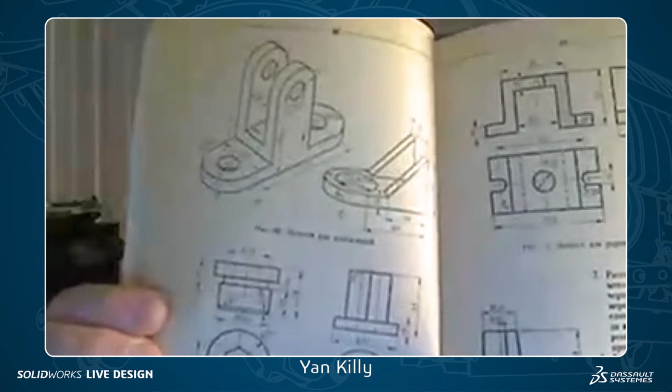I'm a product of drafting, okay? I don't know if you can see it. This is my high school drafting book. I'm not going to tell you what year it's from, but this is what I learned. So it's really front view, top view, side view for me. This is how I think in my head, so it's much easier for me to do that. And for certain things, you can just get away with 2D drafting because it's simple stuff. You don't need very complex stuff.

So what I'll do is use a real life example of the hammer. And the reason I'm going to do the hammer is because my grandson comes every week and stays with us a couple of days. And he likes to do things. His favorite thing is to cut something, to drill something, then to hammer something. Let me start my presentation real quick and you'll understand what's happening.

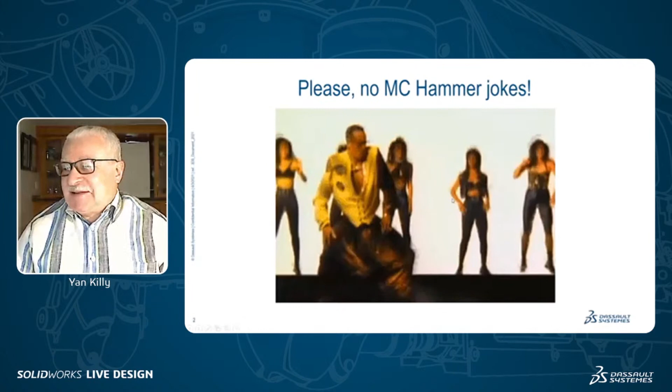Oh yeah, please, no more MC Hammer jokes. Oh, okay? Come on. Here's your pants. Brad donated these pants. So no more MC Hammer time, okay?

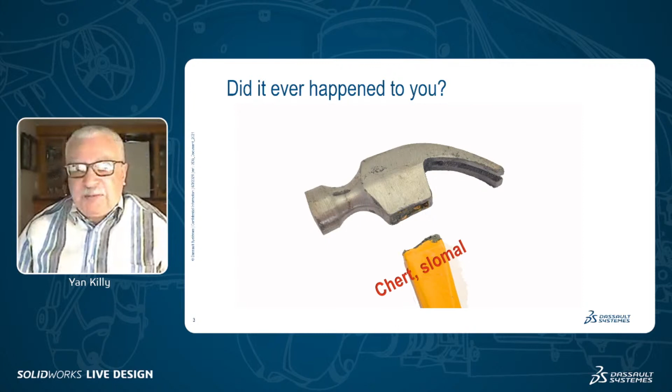So now, the reason it happened, did it ever happen to you? I used the hammer, and instead of hammering with my grandson, I tried to use it as a crowbar. It doesn't work very well. So it snaps. So I went and bought another one. Then guess what I did next week? I broke it again. And I said, well, I don't want to spend another $20. I want to build a handle. But what happens is this, I slomal it.

Slomal, what is this? Is there a Laverne and Shirley reference here? No, it's actually Russian. I promise anybody who speaks Russian knows I'm not using a really bad profanity word. Basically I said, darn it, I broke it again. So this is Russian for darn it. Kind of. What's the chert? Chort, it's darn. Chort, slomal, I broke it. Oh, yeah. How about that?

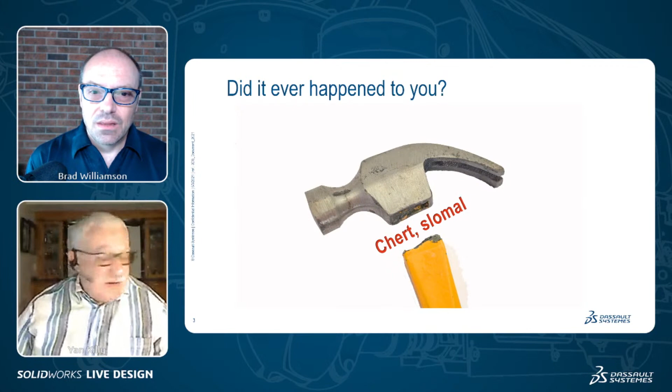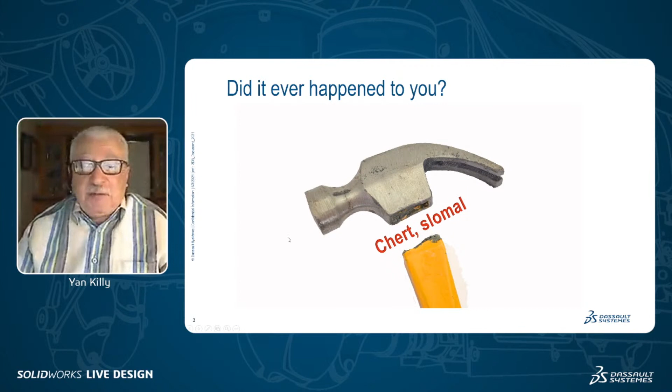So without any further ado, I showed you already this hammer. So what I decided to do, I used my trusted calipers and my scale, and I started measuring. I said, next time I'm just going to build one instead of buying it, because the hammer piece is still fine. So we'll switch over. I'm going to spend a little time because most of our users are SolidWorks users.

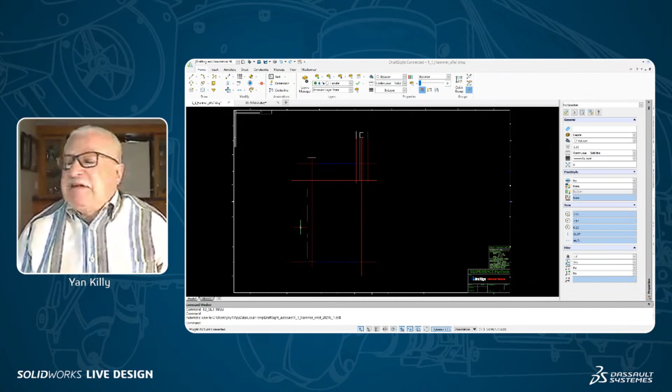So they probably never seen DraftSight, but if you ever used AutoCAD, this is 90% of DraftSight. As a matter of fact, it even speaks AutoCAD. So this is 2D. This is pretty much the common look and layout of a lot of 2D programs that DraftSight borrows from.

You can actually create your own layout that you like to use and save it. You can also go into Classic, which, if you ever used AutoCAD, is pretty much how AutoCAD looks. So if you're more comfortable with that, you can select different things and use them if that's what you want. It's like the old school icons, with the command lines down there.

Just incidentally, everybody joining in on the chat, I'd be curious to know how many of you came from a 2D background. Maybe that's what you learned design on. That'd be interesting to know, chime in if that's you. I'd also be interested to know if there's 2D still being used at the companies you work at. I'd be pretty surprised if there's not 2D somewhere, because DWG is still pretty much the language of a lot of engineering and design, isn't it, Yan?

Absolutely. I still, when I need to go to Home Depot and buy something to fix in the house, guess what I do? I do a quick sketch and measure in 2D, and I go into Home Depot to buy stuff. Well, it makes sense because your background is electronics and PCB, right? Right, I'm a PCB designer really, so although we had to deal with chassis and panels, they were all done in 2D at that time, a long time ago. So I started in 2D.

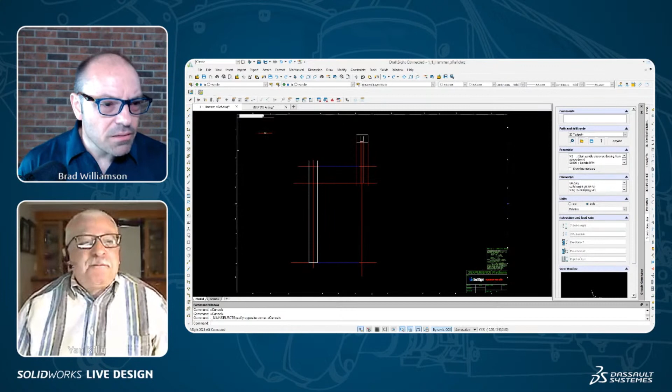So what I'll do, like I said, this is the kind of interface you want, you can do that. I prefer our classic interface from DraftSight. And again, if you want to do lines, you can do lines, you can do different things, you can switch over to different annotations.

So it's very easy. I'm going to add one more in here and go into mouse gestures. If I click on this, it's already all the buttons and quadrants that it's programmed, and what kind of commands I'm going to use. Power trim is used a lot. Is that like SolidWorks Power Trim? You'll see, I'm actually going to show. Yes it is, and actually the other software that starts with A and ends with D does not have power trim, does not have mouse gestures. So we're trying to make it easy for SolidWorks users to use it, and it's fairly simple.

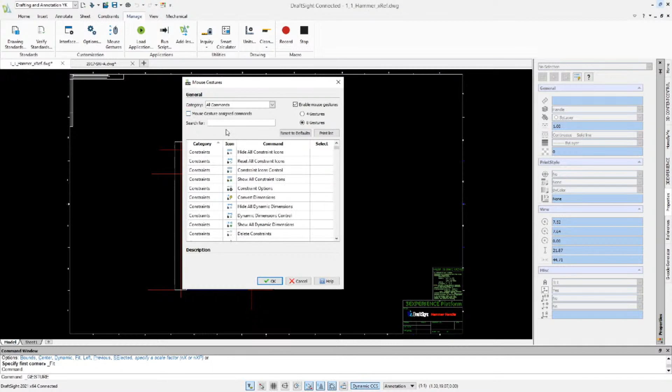Wow, okay. So now I'm going to use a spline. I find the spline, and here I'm going to assign it to the top quadrant and say okay. And now if I go in here, here's my spline.

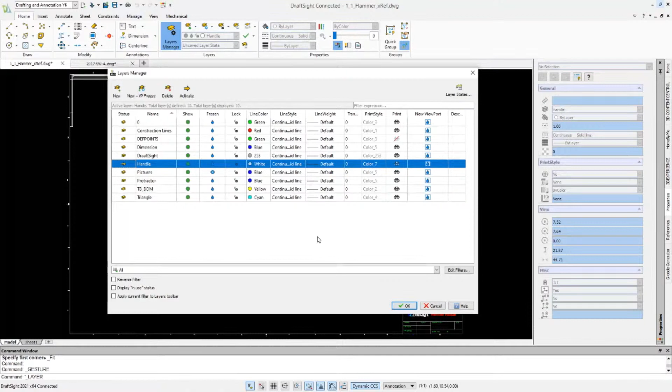So now the reason I brought up layers is they're used a lot in DraftSight. Basically, you put lines on certain layers, you put holes, you put dimensions, you segregate everything by layers, and you can display them on and off. So you use layers a lot.

Now, I like to be more efficient. I don't like to go to the top of the screen, so I can type in, like in other software, if I know the commands, type layers. Notice in the lower left corner, it starts 'lay' and goes to 'layers'. I can click on layers, okay, and it brings this up. Except I don't even want to look down in the lower corner of my screen, so I'm going to activate this, and now wherever I am, I type in, and it pops right where I am, so I don't even have to look down.

Nice. But I don't even like to type. So there are a lot of keyboard shortcuts for users who used that other software before. Like, I know layers - let's say purge, although in DraftSight it's called clean - but I can type purge and it'll do the same thing.

It removes things like line types or blocks I've used in the drawing that I deleted, but they kind of sit in the database, so purging reduces the file size. So what you're saying is DraftSight has its own name for the command, but also recognizes the command name you might know from other software. Exactly, so it's very easy to pick up.

Okay, let's move on. Just one more thing about layers. If you want to draw lines on this white layer, which is my hidden layer, or construction lines on the red layer, you normally have to go and manually switch layers all the time.

But DraftSight did something else. We have TB layers, and in here I can actually say, if I'm going to do dimensions, no matter what layer is active, put it on the dimensions layer automatically. You can set this up based on your standard and save it as a template, so whenever you start a new drawing everything is already configured, meaning very little setup time is needed.

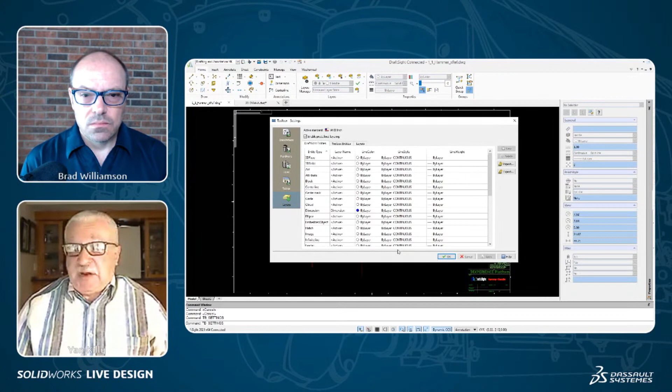That's pretty cool, I didn't know it could do that. What is that called again, TB layers? Yes, it's called TB layers, it comes from the Mechanical Toolbox. You have a shortcut you can click on that goes into settings, where you configure whatever entities go automatically onto which layer. So it's pretty cool, that's great.

So let's move on. I took my hammer, made very careful measurements, drew the handle from the side view, and set it as a block. Now I'm going to insert the block. Where is the insert block command in here?

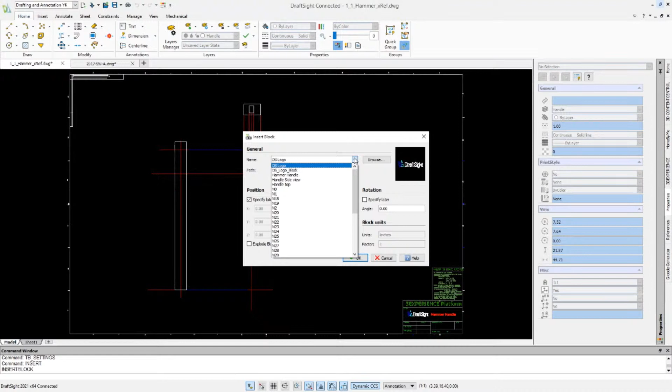I have no idea, and even though DraftSight is the product I support, I don't have to worry about it because I'm just going to type 'insert,' and there it is - I don't even have to look. I'm going to insert the block, simple as that. I could have even programmed it into my mouse gesture if I used it a lot, but I don't.

I'm going to insert the hammer side view, say OK, and notice as I move it snaps because I activated eSnap, so it can snap to different entities. So here it is, and now I've inserted it.

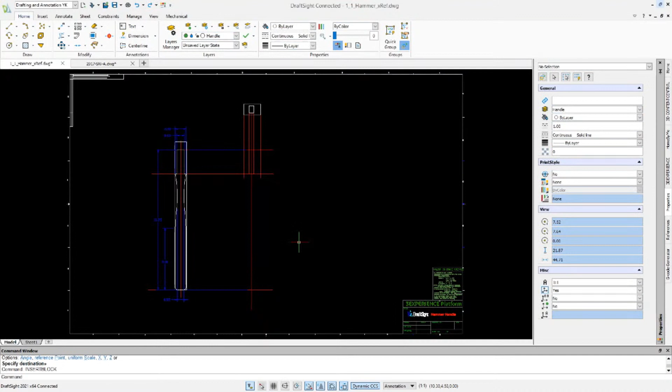I don't want to insert it again, but now I'm going to do a zoom area and zoom in - I put it in like a little block. So I'm going to delete this block, and delete that. This is the handle from the hammer that looks like this, and here are the dimensions I put in.

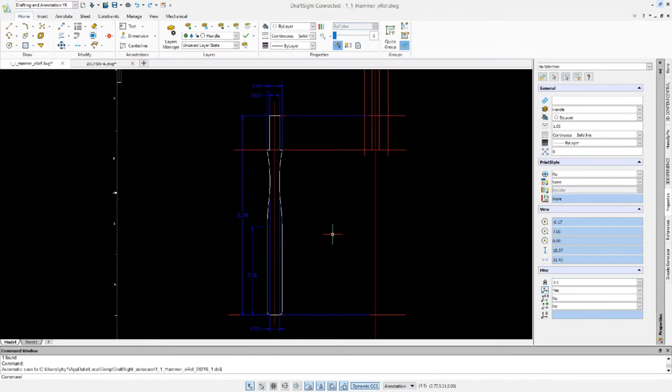Now it's time to do the front view, which is a little more complex and has some curves, like the other side did. Now I have to sit and measure, so you're going to have to bear with me - I'm going to sit and measure and draw all of this. It's going to take a long time.

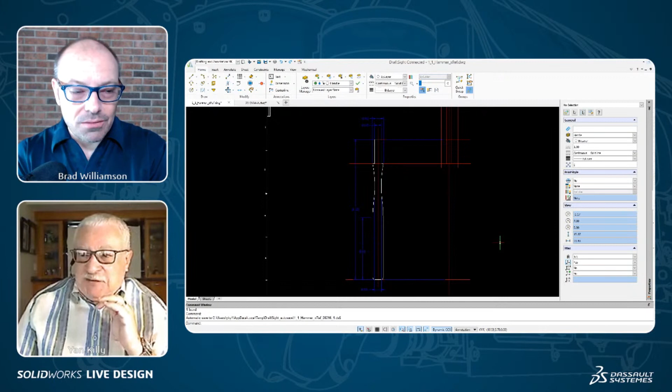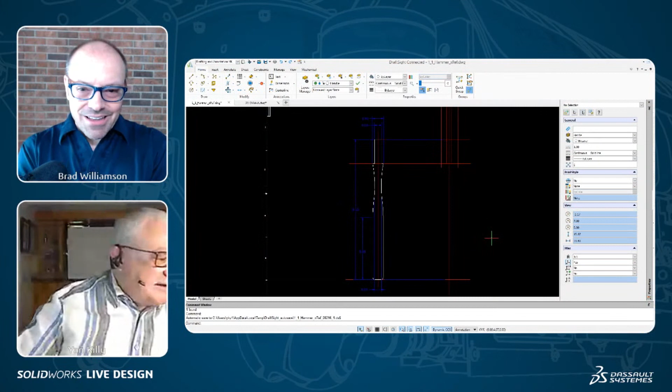Oh, question here - Tomas is asking what is the name of the book you held up, your mechanical drawing book? It's called Cherchenia, which means drafting in Russian. Cherchenia, wow, okay. Yes, it's from the 8th grade of high school.

So you're going to go ahead and measure this handle? Why don't you just take a picture? I saw a live design where Mark Peterson took a picture of the thing and just traced around it. Oh, that's a great idea. I don't know why I didn't think of it myself.

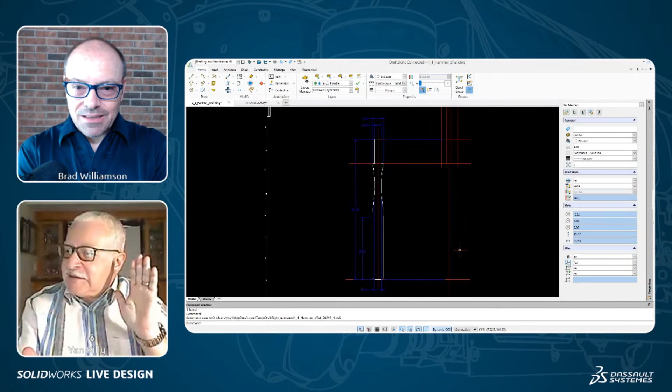So, magic, forward five minutes - I took the pictures and brought them in. We're going to go into the layers and activate my pictures. This is the hammer, this is the scale - I took the picture and put it in, and I'm going to trace it instead of very carefully drawing it with dimensions. Again, I'm going to turn ortho off.

I'm going to take my spline and start with the spline, very slowly. I might modify it a little bit to make it better - it doesn't have to be exactly the same, right? We can improve it as we go along.

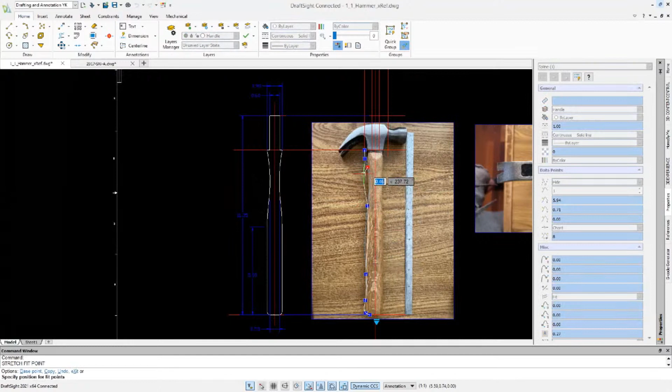And again, we say okay and enter. So here's the spline. Let me see if I can modify it just a little bit. Let me move this to this side. Okay, let's move this here. About right there. Okay, kind of looks good. Maybe a little bit more here. So you can play around, and I kind of like this.

Then I'm going to do a line. The line is going to start from here, because snap is on, it snaps to the actual construction lines. I'm going to add one here and one more in there. Now I have to draw the other side.

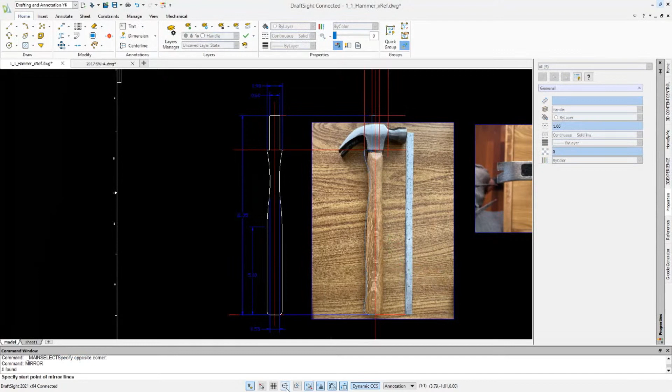I'm lazy, I don't like to draw everything from scratch. So how about we just select all of that, and I'm going to type mirror. Now I'm going to activate my ortho, and start from this point to this point, and basically that's the handle.

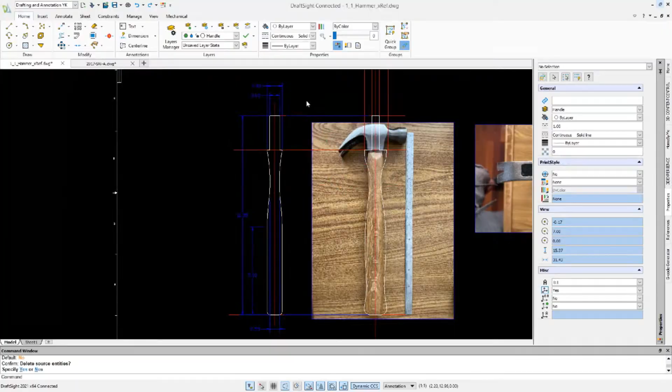Makes sense. Okay, very simple. I was talking yesterday to Brad prepping for this, and Brad goes, Yan, why do you need to complicate your life? Why not just make it axisymmetric and turn it on the lathe, without all this? I said, okay, let's not even worry about that, let's just concentrate on this part. Doesn't that make sense? I mean, for me, I always look for an excuse to go buy a new tool. If I were going to make a new handle rather than buy a new hammer, that's an excuse to go buy one of those little shop lathes.

But as we go along now, it looks good, right? So maybe we don't need to see any more construction lines, I'm just going to turn them off too. I'm just going to freeze it for right now, I didn't lock it. What do you mean by that term freeze, is that like hide? Yeah, it's hiding it, it's still there, I can always bring it back on.

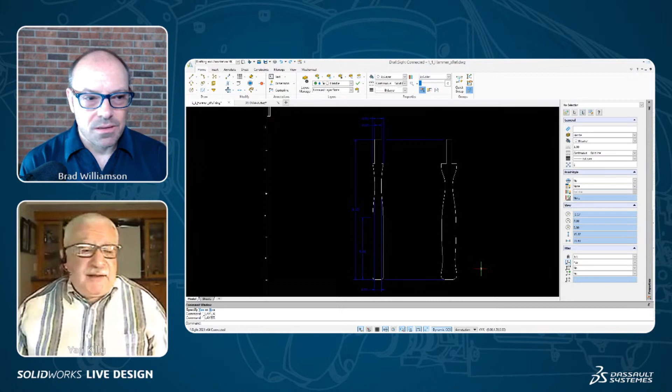Okay, so here's the handle. Again, as we're talking, I wish I could take credit for everything, but Brad actually said, Yan, why don't you have some grooves in there so it doesn't slip from your hand?

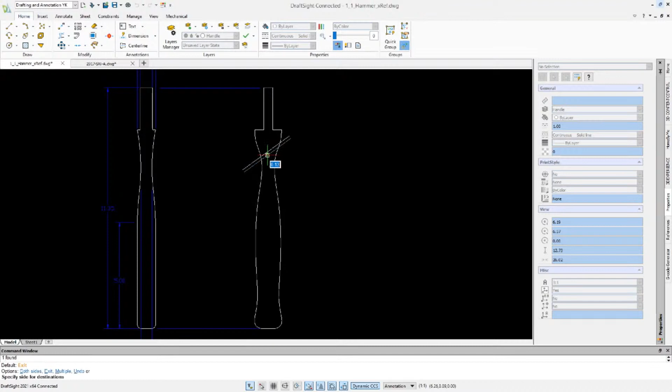So we're going to zoom in a little bit. I'm going to do this, and then we'll use a power trim tool for it. So I'm going to do a very simple line, just starting from here to here. Now how about if we offset this line, and you can specify 0.13, which is the standard tool, and there it is. So I created this, right?

Then the next thing we're going to do is I'm going to select this, and use array, or in our speak, in DraftSight, it's called patterns. But you can type array, it's the same thing. Yeah, so in Solidworks speak also, pattern. Yeah exactly, pattern, array, same thing.

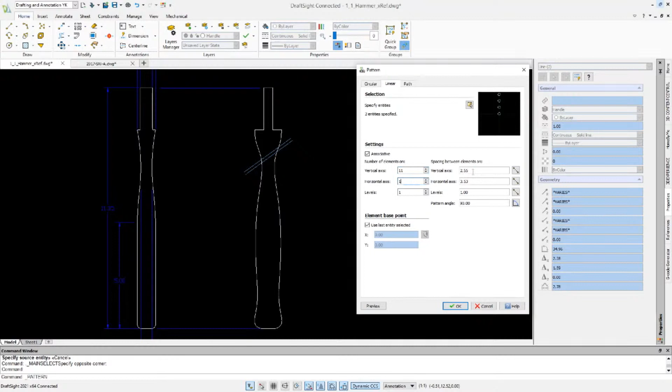So I'm going to say I'm going to make 11, I'm going to do only 1, and I'm going to go minus 0.8. If I'm satisfied, I'm going to say okay. Well, there it is, that's pretty slick. And I did this pattern associative - the difference is associative means it's kind of a block and I can modify it.

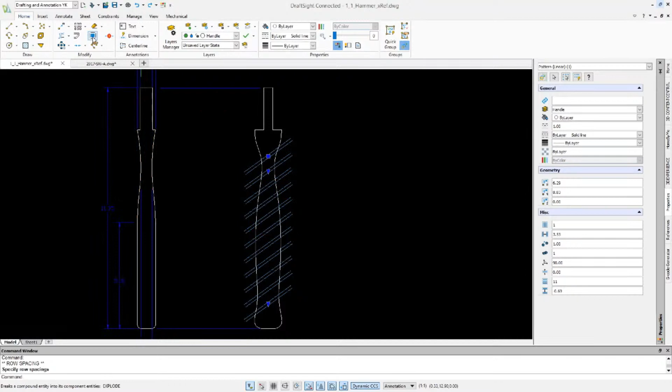Now let me show you what it means, and later I'll explode it. So if I select this, you see these handles right here, I can move them around dynamically, very quickly, and readjust it. Let's say I'm going to do it like this - this is the one I like. So associative is like parametric? Yes, so you can actually enter all the parametric data that you want, and dynamically adjust it using those handles when I'm modifying it.

Now, to trim it, because it's kind of a block, I need to explode it.

Very simply, I'm going to select the explode, or I could have typed explode in my command box, and now they're all individual pieces again. Okay? Now I need to do the trim. Of course, the trims are here. There is normal trim, there is power trim, there is end trim, fill. There's a lot of commands. But all I'm going to do is the trim.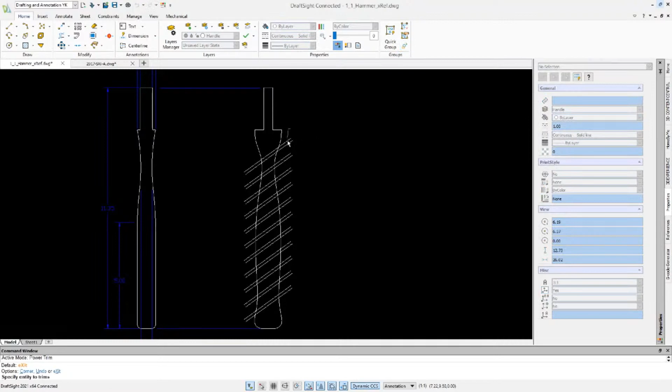So I'm going to go into my mouse gesture, and this is where I program my trim. And all I have to do is just hold my mouse down. I forgot to explode it. Explode. I thought I did. Explode. Okay. If it's exploded. Yep, it is. Looks like it. Okay. So when you explode it, it makes it just like regular entities then. They're not linked together. And now I'm using the power trim. I just go done. And oops.

That's just like SolidWorks 3D. Exactly. So again, we build so much similarities for the users, so you can be comfortable. Again, if you're doing something simple, for me, it's easier to do it in this format, okay, instead of going and build a 3D model. Nothing wrong with that, but I can just do this real quickly in here. And if, let's say, I'm doing a gasket, something simple, I can quickly do it in DraftSight and then send it to Omax WaterJet and have it cut out for me in no time at all, okay?

Yeah, makes sense. I don't think 2D necessarily means old technology. It just means that for a lot of disciplines, it's really just kind of the best tool for the job. Like you said, coming out of an electronics background, it was just right. It was just the better tool.

Yep. So now one more thing I'm going to do. I'm going to quickly do a couple dimensions and see how easy it is. It's really that easy. So I'm going to activate again. I'm going to do ortho. You can go dimensions. You can go an actual dimension. There is much more than that. I'm just going to go very simple linear dimensions. I want to know how big this is. And here's the dimension. Now I'm going to go from here, just hit again here, from here to here. Here's another dimension.

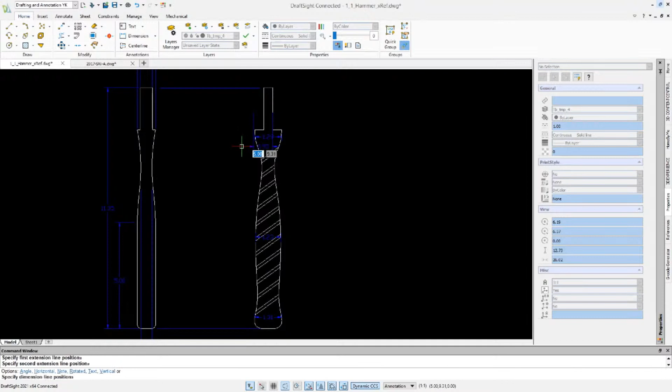Maybe this one. From here to here. That's fine. I should have moved it. Control Z. Control Z, undo. Yep. Same. Everything. Basically, if you know Windows, it's the same thing. Now I'm just going to do this from here to here, and from there to there. Simple stuff, and maybe a couple more. Yeah. What's overall length, I guess, is from the other view. Yep.

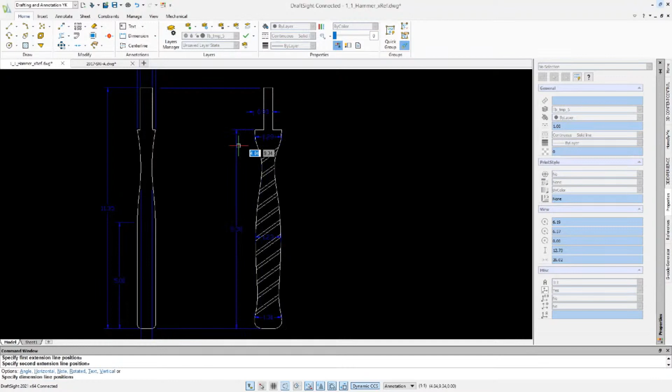I accidentally escaped from the command, so I'm gonna go from this point to this point, and then there you go. From this point to this point, and it's right there. Fully defined every time. Well, over-defined now, but okay. Yeah, but let me just delete this. We don't need this. So now you're going to say, why would you dimension this inside the handle? I mean, this is not the norm, right?

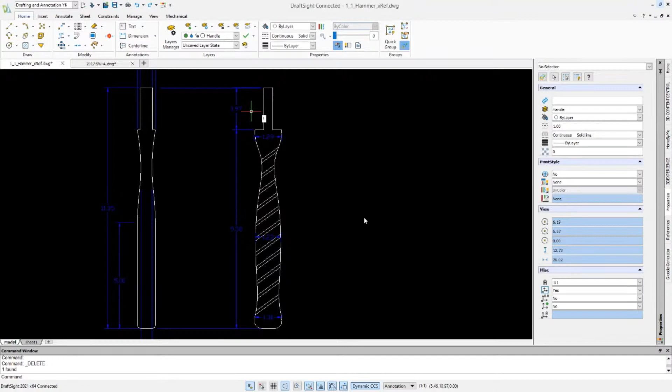Brad, if I really do this and give this drawing to the shop floor, they're going to come scream at me and say, you don't put dimensions inside. There's actually a method to this madness, why I did it this way, okay? If you bear with me, I want to show you why. Well, I'm planning to buy this wood turning table, and it's got the tool rest. And maybe I can print this one-to-one and overlay the tool, and I don't have to even measure it and cut this. Yeah. So how about we print this?

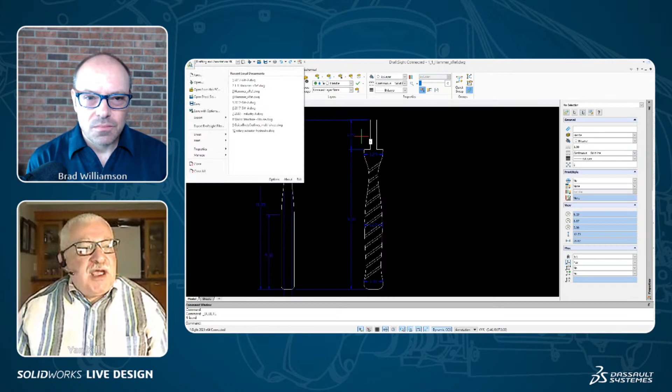And not only that we're going to print it, we're going to switch over to legal size. We're going to rotate 90 degrees. And instead of fit to page, I'm going to print 1-to-1. And then I'm going to say I want to center on the page, okay? And just print this. Now, the reason I put all the dimensions inside is so it uses a smaller piece of my paper so I can overlay it on my tool rest and use that as my guide, basically. Okay, that makes sense.

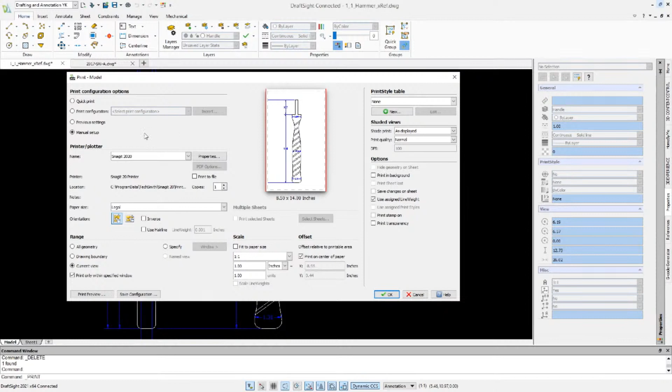Yeah, if I say, okay, let's print it, it's actually going to go print it, because my default printer is my Snagit, and this is what it's going to do. So I can print it out, overlay it, and use that basically as a template, as a cutting tool. So I have to do very little measurement as I'm building this part. Okay?

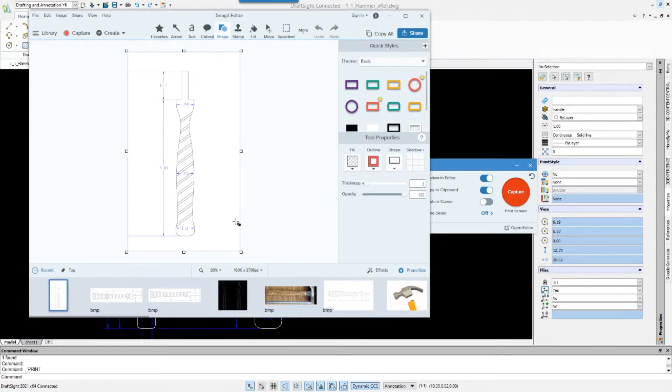Yeah, it's just a pattern. That's awesome. I remember doing SolidWorks demos years ago. People asked for this kind of thing where, can I just print full scale to get a scale reference, or to use as a pattern, something like that.

I forget what, Toby. Hey, Toby Schnaars. Yeah, fully defined. That's my man. He probably remembers what version of SolidWorks that full scale printing came out.

But now I remember back in the old days too, Van, printing used to be kind of tricky to do out of 2D. You had to have special drivers and stuff. And now it's just built into Windows, right? Yep. Whatever your default printer, or if you have multiple configured, say do it to it. I did it electronically, but of course I'm going to print it at the end. And basically that's it. That is how simple it is.

So instead of spending $20 every time I break the handle, I submitted a $500 purchase order to Diana Keeley for the approval of the bench rest lathe, and hoping to buy that with some tools and put it in the garage and build it.

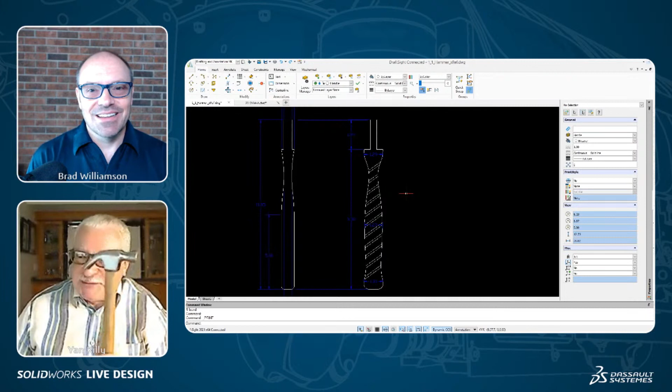Now, well, I hope you get your lathe, but I got to wonder what kind of vitamins you're taking that you're breaking hammers all the time, because that sounds a little dicey to me. Because I have a crowbar and walk over there and grab it, but I'll just try it with the hammer. But okay, and my grandson, when he comes over, this is his favorite. I have my own bigger hammer, but this is his hammer that he used to hammer stuff with. So I got to have a backup for sure. Now, what's your grandson's name? Jalen. Okay, you got to back off the spinach on Jalen, because if he's breaking the hammers, look out. Yeah, if that's the case we're all in trouble.

Anyway, so here's the stuff that I did. But, as we were talking yesterday, Brad, you said that you do have a printer, right? Like a 3D printer. Yeah, I have a 3D printer. Okay, so I don't have a 3D printer. Can you see if it will fit and you can print it on it? I mean, I could try something like that. It looks like it's about 9.5 to 11.5 inches. Yeah, it's about 12 inches. So my printer does 8x8. So if I put it in diagonally, probably come pretty close.

But how can you determine that? Can I send you a file? Well, yeah. I mean, obviously I would need a solid model and STL. But if I just had a DWG of something that you're going to turn, I would take the DWG into SolidWorks, and then I can just take that profile and revolve it out into a solid. It'd be super fast.

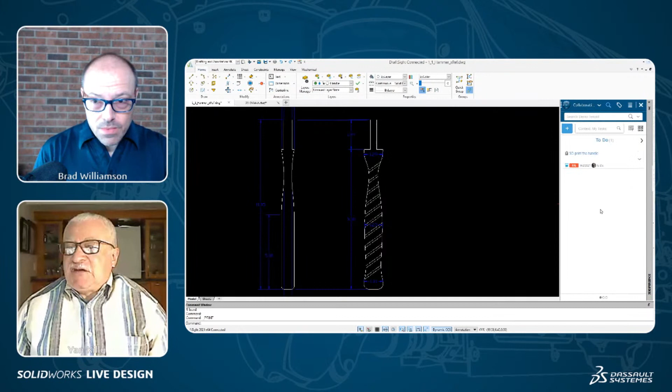So I can email you the file, right? But emails are old school, right? I don't want to deal with the email. I don't want to zip that file. It's maybe a big file, maybe a small file. But we have now DraftSight in most of our applications in 3D Experience. So what I did is I actually went and created a task for Brad, okay? And there is no email involved, and he'll get a notification.

So for Brad, I said, okay, I want to 3D print this. So I'm going to say, Brad, can you see if it will fit into your 3D printer? Okay, he'll get the notification, but what about the file? How do I get the file to do it? Well, from my computer or from 3D Experience Collaborative Desk or whatever that may be, I'm going to say, okay, how about we're going to look for the DWG drawing. And this is called Hammer, okay?

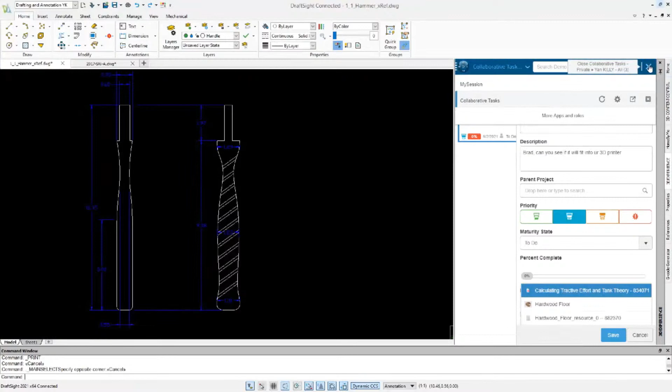So I'm going to grab, oops, where is it? Hardwood floor. No. Well, let's say this is the... So I don't think you saved it yet to the platform. Oh, okay, let me do this. But that's okay, because this is a really good spot to pause for a second, because what you're doing here is some pretty heavy stuff that if anybody in the chat has used DraftSight before, they probably haven't seen this piece of it. You're actually using 3D Experience DraftSight, right?

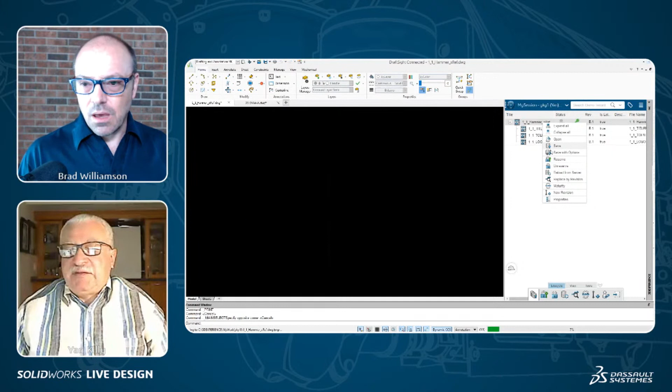Yes, I am using 3D Experience, or basically DraftSight connected to the platform. Yeah. So it's DraftSight that's running on your desktop, but it's actually connected to the 3D Experience platform for doing your file storage in the cloud, secure data management, collaboration, and all that. Exactly. This is what I'm doing, and I'm going to save this to the cloud. There is another drawing that I love to use during the demonstrations, and while it's saving it to the cloud, it's literally going into a collaborative space that I shared with Brad.

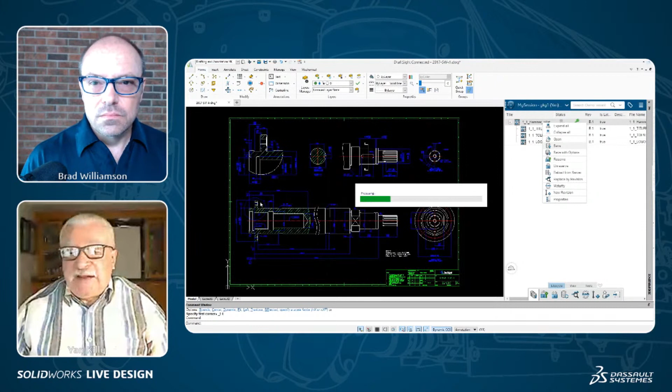But besides that, I'm going to send, you can attach other people and then attach that drawing to the people that you want to share with. So here is this drawing. It's going to reappear again.

And now what I'm going to do is, I'm going to more applications. And this is where collaborative tasks comes in. And I'll open up, and I can set up things to do for Brad or anybody else. Can you please help me out with this, right? So here's the print. Let's say 3D printing. I'm not going to type it again.

Yeah. And by the way, Andrew, our producer, just chimed in, and he said that the diagonal on my printer is 11.3 inches. So I think we'll just make it. Yeah. So that might be just, and here's the hammer time. Okay, and I'm going to select this one, and it's going to get attached.

So this does all the revision control and everything too, right? Yes, it does all the revision control. You can even preview it in 3D Play. You can assign new revisions and so on. And so basically, I just set up a task for Brad to go ahead and use this drawing, and he can go and see if he can print it on his printer.

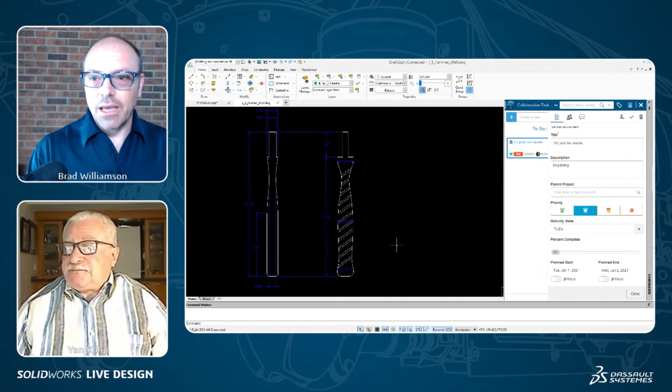And so what happens on my end then is I get a notification when I'm connected to the 3D Experience platform, even though I don't even have 3D Experience DraftSight installed, but I'm on the 3D Experience platform for my SolidWorks and some of my other 3D Experience roles. So I'll get the notification from you, and I can pull the file down right from the platform. So no email, no file transfers, and so on. Yep, exactly. Yeah, that's pretty good.

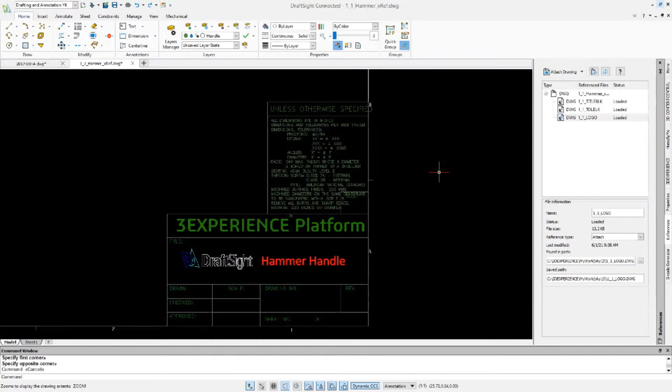So one more thing I want to show you, in here, here is a title block, and there are references. So you can actually set up as references. Here is the title block, here is the notes, and here is the logo. So you can set it all up as part of your template when you start it up to satisfy your company standards, and just go in it.

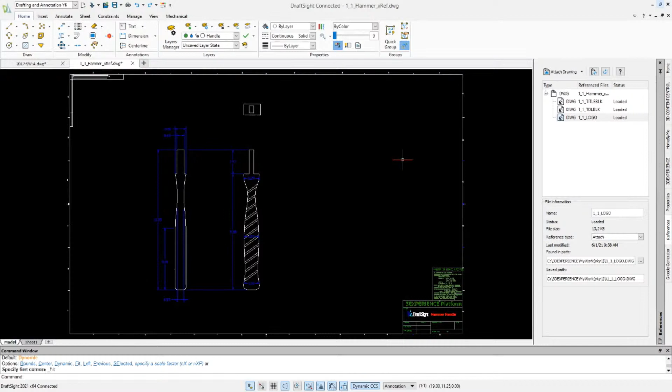It's very simple software to use. It's very light footprint on installations. It's 1 gigabyte, and it doesn't require very complex or expensive hardware, and it just works. So if you use DWG, DXF, easy. I can export all the way to R12 DWG, which is really like almost 30 years back.

And I've heard some anecdotes from our users that do use DraftSight, actually, that they can have a corrupted file that came from other software, and DraftSight does a very good job to untangle it. Actually, you did that. Remember, about a month ago, you couldn't open it. You said, "Yeah, can you open this in DraftSight and give it back to me and save it?" And I did, and it worked. So, good software, easy to use for people like me who grew up in 2D. Easy.

And it does work with SolidWorks too. You can go back and forth, you can share files, and you can use the 3D platform if you want to collaborate with people, store, revision control, maturities, assign tasks, check on stuff. It's awesome. And it's simple. Yeah, it makes a lot of sense.

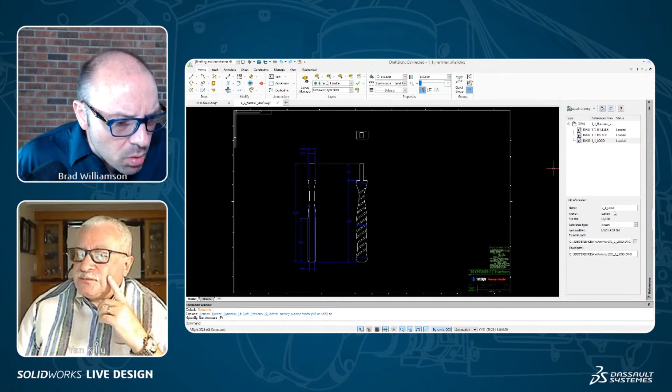We got a few questions in the chat, and I want to talk to you a little bit more about the 3D Experience platform integration here. But Tamborora, I'm sorry if I didn't get the name right, but there's a question here about cadastral units. CAD Astral, that's not a term I'm familiar with. Are you familiar with that term, Van? Can CAD Astral units be used in DraftSight? I'm not sure what that means also.

I know I can use millimeters, I can use inches, I can use whatever, and I can switch back and forth. What's the comment? I don't know, maybe it's the minute number of units. I know the precision is very high in here too. Yeah, maybe we can crowdsource that to the chat. I'm sure somebody's got a fast finger on Google.

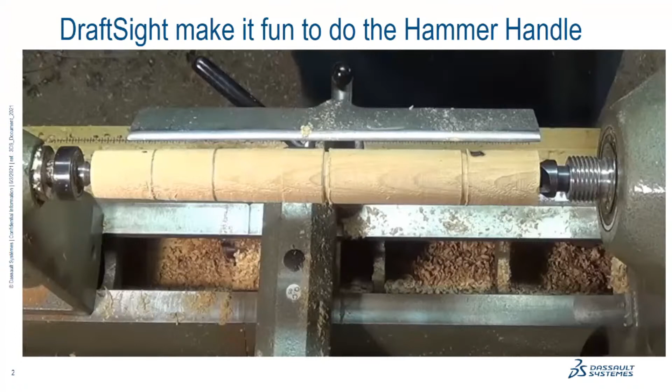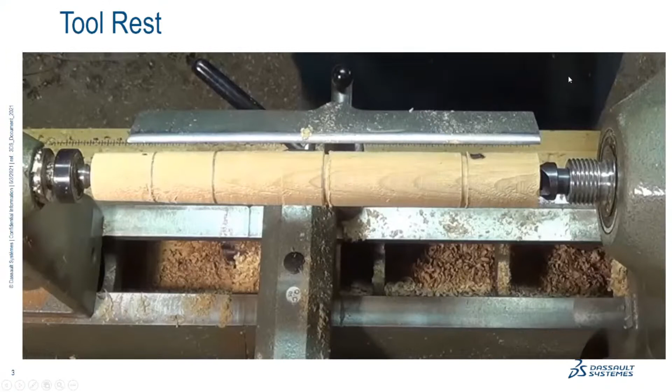But while we're waiting, let me show you what I meant by why I wanted it to print one-to-one, and why I wanted it to put the dimensions inside the handle itself. Okay, so let me quickly do this, and you'll understand why I was doing this. So here's, let's say, a wood turning table, okay, with the wood blank that I want to make a hammer out of, right? And here is the tool rest, what they call it. And if I go down, here's the tool rest, and I want the handle one-to-one.

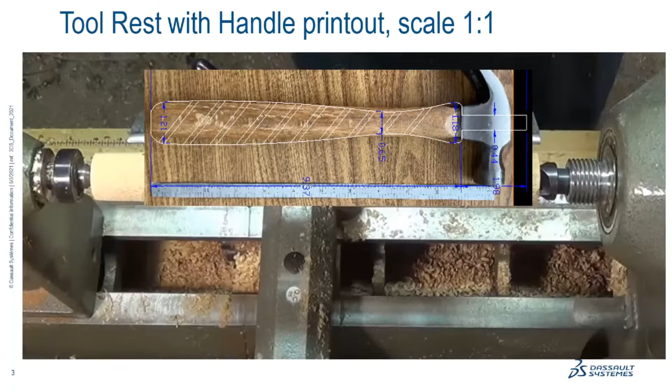So this one-to-one does not look, it's hard to see, right? So I printed out the other one, and actually I did two different patterns, crisscross. I think I went a little bit too ambitious on that. Even a single crisscross will make it much less slippery in my hand. And then you can tape it, and then you have to do very little measurement. You just use your wood cutting tool, rest on top of it, and just follow along and cut this piece very quickly. Yeah, there you go.

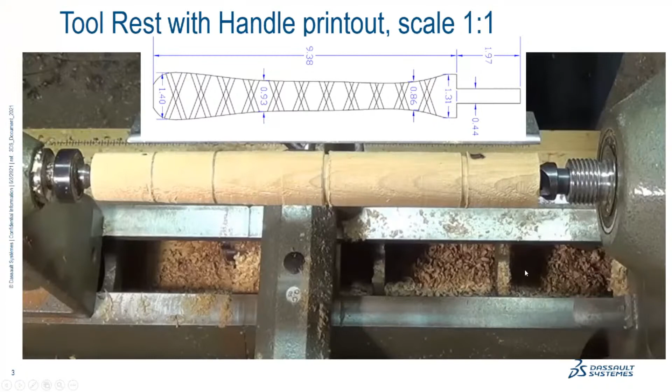That makes a ton of sense. And that's why that one-to-one scale printing is so important, whether you're in a 2D tool or a 3D tool. Now, so this is a turn part, but what if it's just a prismatic plate extrusion or something like that? You could. No problem. Sure, you can take the pattern to cut it out with a jigsaw, or maybe go to something more elaborate like a water jet, laser jet.

Yeah, laser jet. I know that we've talked with our friends from Elmax, and they can do pretty much anything you want, even in 3D parts. But yeah, it's very simple, and you can create those patterns or arrays inside DraftSight, any complexity you want. Save it as a block and repeat them, or whatever you want to do. It's very simple to do, and you can print it one-to-one.

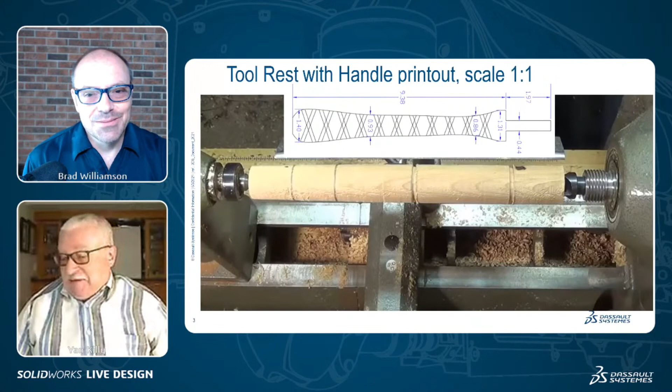Absolutely. Yeah, that's cool. Hey, you know what? I like the word pattern a lot better, because when you say array, sometimes it sounds like erase. Yeah, I personally like patterns myself too, but this is what the other software used to call it. So in our software, you can type patterns and you get patterns, or you can type array if you knew the command from the other software, and guess what you're going to get? You're still going to get patterns, but array pattern. Yep.

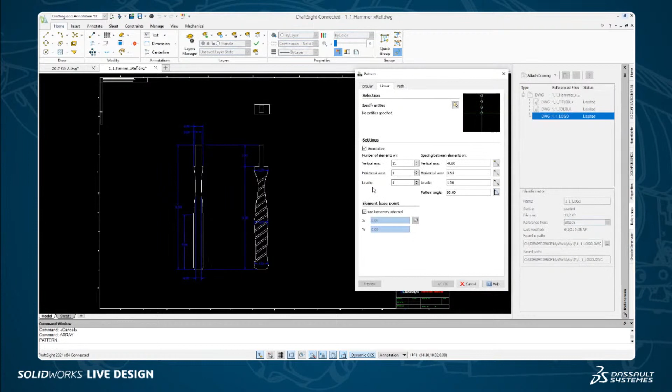And I kind of like this. In the other software, if you want to do circular, linear, paths, there's a separate tab, and you have to go and change to a different one. Here you can just go through a different tab and go to linear pattern or path or circular, where in the other software you have to actually pick another type of pattern, and there is a different dialog to set it up. Here we can do it all at once. Yeah, it's kind of like a super feature.

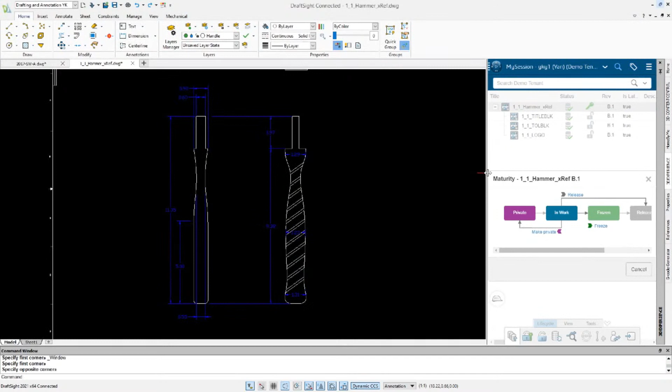It gives me all of these capabilities, and DraftSight can be fully used with our 3D drive storage, collaborative space. You can set up a collaborative space for a project that you might want to use. You'd be surprised how many companies still use DWG format for very big, complex things, and it's much easier. Did I open the right version or not? Is somebody else doing it?

Like in here, I can lock it, which this one is locked, so everybody can open it, but only in read mode. And until I release it back, nobody can open and modify it. And I can set up maturities, release time, and so on. And I can roll back the revisions, go look at the history of it. So 3D Experience platform is very useful, even for small shops.

If you have 3 or 4 people, if they store it locally, has that been modified or not? So if you go to storage like 3D platform, everybody pulls from a common location, and if it's been locked, oh, somebody else is working on it, so I can only see it in read-only mode, but I can't save it. So it makes it much more user friendly for the file, so there is no confusion and no accidentally changing the wrong revision when somebody else was working on it. So it's very, very useful.

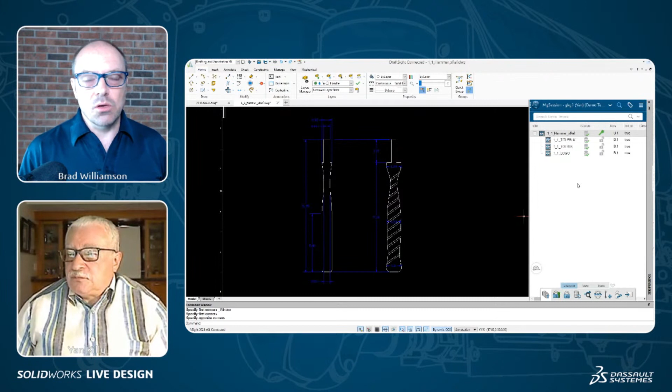Yeah, it makes a lot of sense to me, because even if your engineering language is DWG, primarily 2D, that still means you have the same problems as a lot of folks who do 3D work. You have problems with versioning, common storage, releasing products. That's not unique to 3D. So it's kind of cool that there's this solution that gives people who converse in 2D a way to share, collaborate, and manage data. And it just so happens that it also works great with your 3D data too.

So if I go and say I want to see this, it goes into our 3D play. So even if you don't have DraftSight installed, you want to see what it looks like. If I share the drawing with you, you can go and look at it. You can zoom in, you can pan around. In fact, for me, when I get your notification, that'll just come up in my web browser. Right, it will come up in your web browser right in that window.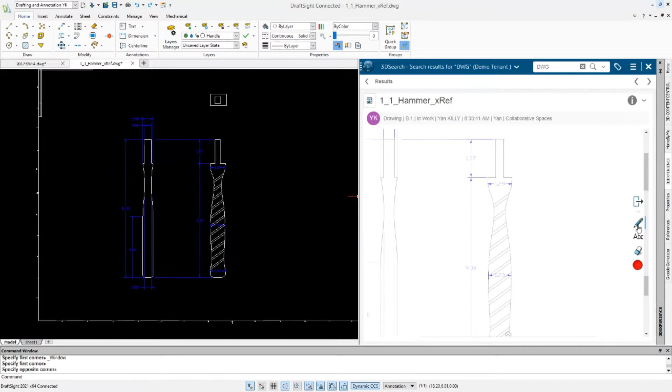You can see it. You can even say, "Hey, Yan, let's see," and I'm going to draw this and say, we want this 1.15. Okay, mark it up. Yep, you can mark it up. So it's easier. You don't have to find out if you have a viewer for DWG or DXF. We can just throw it in and no problems. Right, no software to install with that. That just runs in the browser, which is pretty cool.

So just to be clear, DraftSight is a native application, right? You install that on your PC or your Mac. But the 3D Experience plugin, that's all running on the cloud then? Yes. Okay.

And with the new revision that we just released, FD06, there's a couple new things which are really cool. Let's say you do work on the cloud and all of a sudden you're going camping, but you want to finish the project, right? So you would say, I want to export. Once you save it, you basically can export the files to your local drive, and then after you're done, you can upload them back into the cloud. Yeah, makes sense.

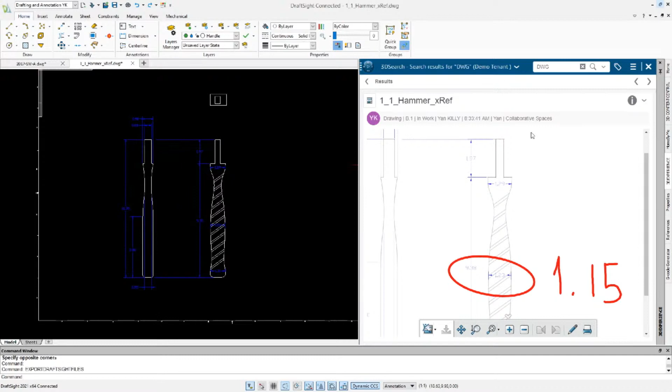Well, this is cool. So Yan, I guess we've come to the close of solving the problem here. You set out to design a new handle, so you can quit having to buy hammers all the time. But also, I hope you get your purchase order approved so you can go get that lathe. Absolutely. That'll be a lot of fun, not just for hammers, for all kinds of tools or little home projects.

So you used DraftSight connected to the 3D Experience platform to accomplish that, and it's pretty cool because this is not a tool that I've gone into a lot of depth on, but it opened my eyes to some different applications for it. Pretty slick.

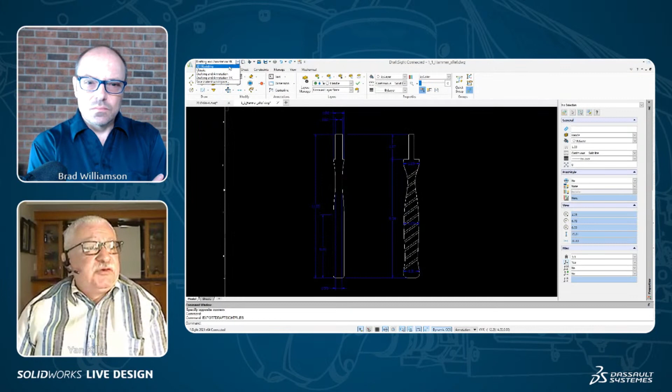So we're trying to make it as easy as possible for people to get and use it. And like I said, if you use that other software, you pretty much know 90% of it anyway. You basically type in the command that you used, and it will recognize it. You don't like this GUI, you switch it to Classic, okay? I don't care, it's up to you.

I like command line. There's some people that really like their command line, and that's fine too. I sometimes never even looked at where the insert block command is. It's probably in here. Let's see where it would be. Oh, here's insert block, okay fine. This is the first time I actually look for it because I can just type insert and it knows that I'm going to insert the block, right? I just type insert and there it is.

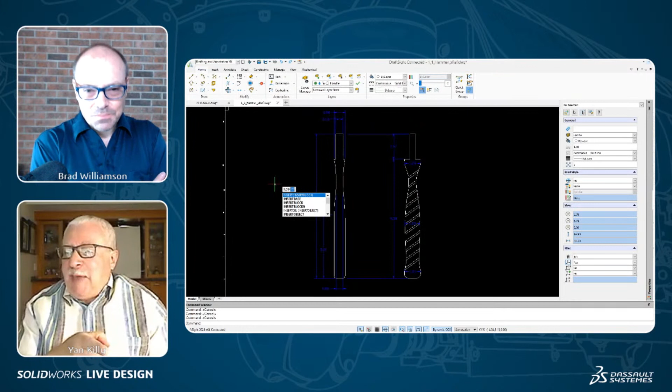That's awesome, so you just start typing if you know the commands. Yeah, and believe me, these commands have been around for as long as I've used it: insert, block, p-line, p-edit, layers. There's a whole bunch of other commands you can do. Format C:, oh that's different. Format C:, C drive... don't try that at home, kids. No, don't try that, no.

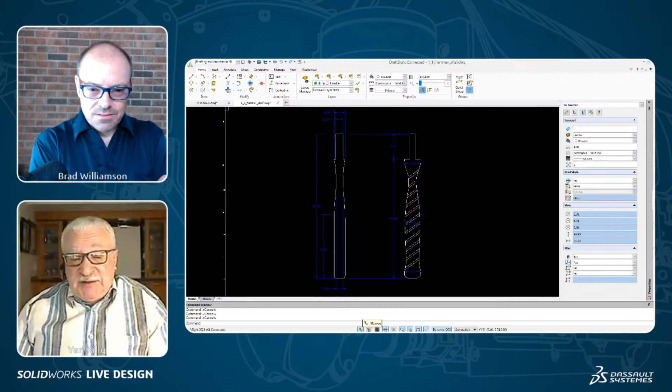But this one that I really like is being able to set it up so all of your layers are default, so it throws it automatically. Notice when I was doing the drawing, my active layer was handle, but when I did dimensions, because I changed it, it automatically put it in the dimensional layer for me. So I didn't have to manually change the layers all the time.

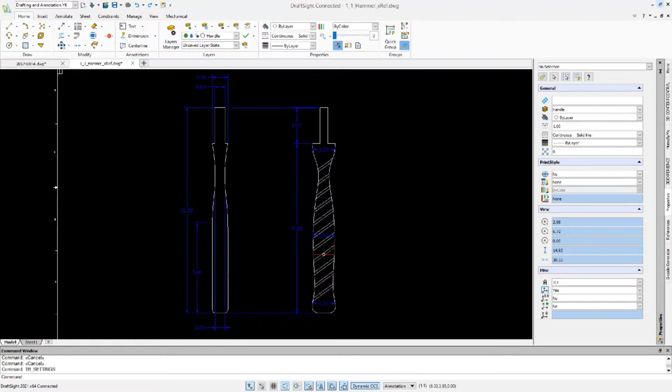Yeah, that's cool. It makes me wonder, when you start typing like that right in the screen, you can do that in SolidWorks now with the command search. I wonder which came first, or which was inspired by what. Makes me wonder, but really cool, Yan.

So what else do you have to show us? Did we solve the problem here today? I think we did, and that's pretty much what I was going to show. I don't want to overwhelm everybody. If there's any other questions, we'll try to answer them. If not, we'll try to come back and answer them later.

There's a couple questions. Yeah, I think our moderator Olga behind the scenes has been moderating. She even answered a question in Russian. That's pretty crazy. It looks like the chat has been doing a good job of self-moderating and getting questions answered, so things are looking pretty good from that end.

Okay, what I don't see...